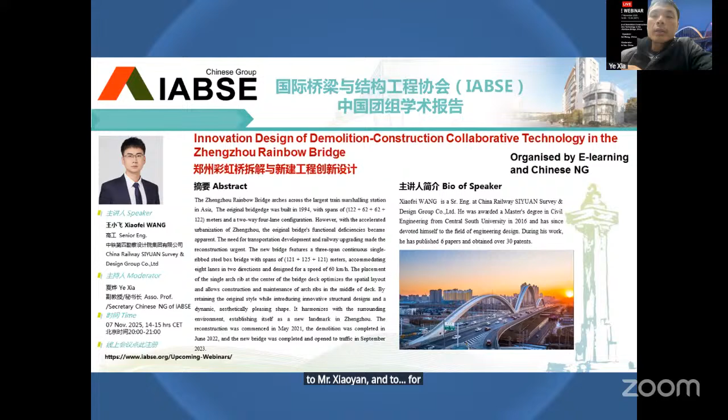All right, okay. Hello, hi Mr. Wang, so it's all yours. Okay.

Good evening, respected professors, distinguished colleagues, and dear friends. First of all, I would like to extend my sincere gratitude to IABSE for organizing this conference and providing us with such a valuable platform to share and discuss our academic achievements. It's a great pleasure to meet so many industry leaders and experts deeply committed to bridge engineering. I'm truly both honored and excited to be here today.

My name is Wang Xiaofei, from China Railway Siyuan Survey and Design Group Company Limited. Today I'm privileged to present my team's research titled Innovation Design of Demolition Construction Collaborative Technology in the Zhengzhou Rainbow Bridge. It focuses on the practice of bridge reconstruction over a large railway marshalling station. We address the critical challenges of safety and efficiency through innovative demolition-construction integration. Let's dive into the details.

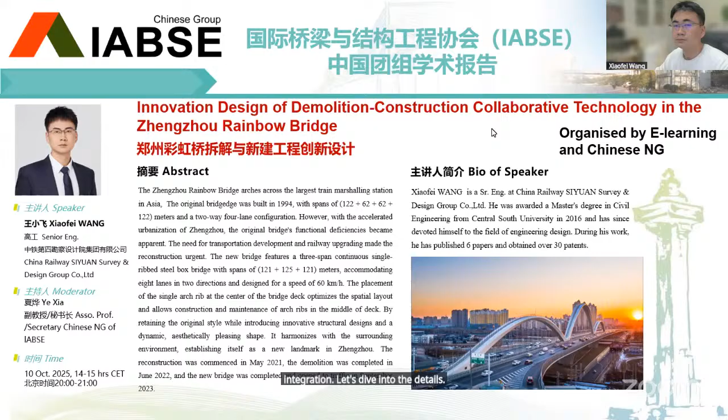Part one: the research background and project overview. The city of Zhengzhou is a major transportation hub in central China. It's not only rich in history, but also a city of dynamic development. It is crucially located at the intersection of the Beijing to Guangzhou and Lanzhou to Lianyungang railways, a nexus dominated by Asia's largest marshalling station, the Zhengzhou North Marshalling Station.

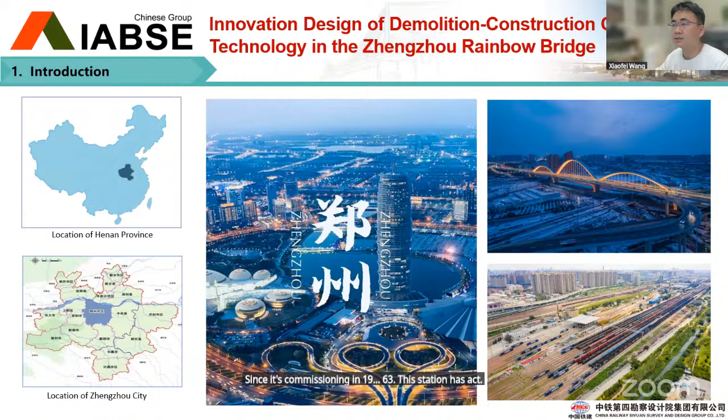Since its commissioning in 1963, this station has acted as the heart of the China railway network. Against the backdrop of China's rapid urbanization, old municipal bridges like the one in our case faced two key pressures: outdated functions and poor compatibility with infrastructure upgrades. This challenge is particularly acute for bridges over busy railway marshalling yards, where any demolition and reconstruction must avoid disrupting railway operations while also meeting growing traffic demands.

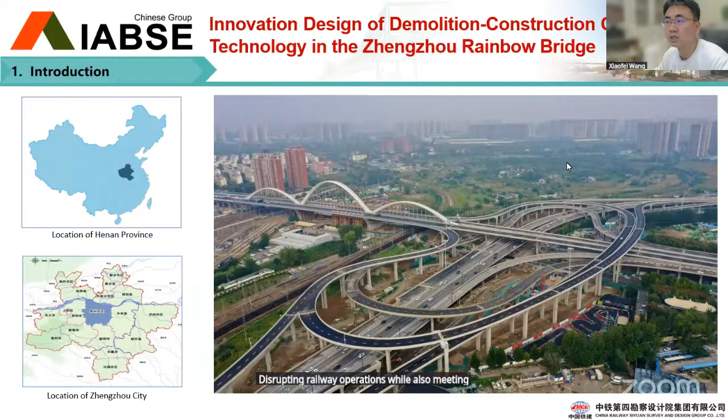The Rainbow Bridge in Zhengzhou is a typical example. It spans across the largest Zhengzhou North Marshalling Station, crossing 17 tracks from west to east, with numerous control points and extremely limited construction space. The task presented unique engineering challenges.

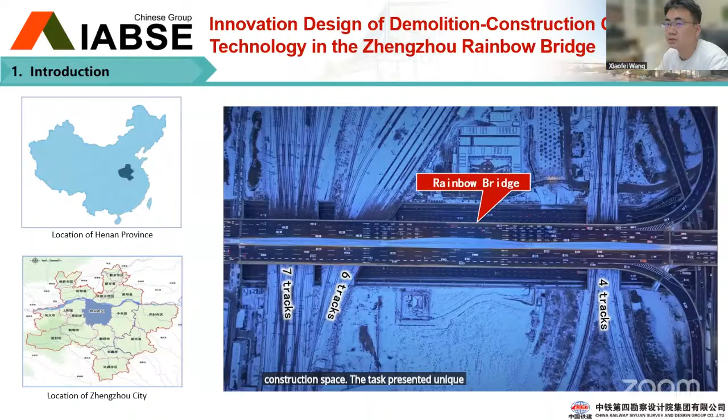The original arch bridge was built in 1994 with spans of 122 plus 62 plus 62 plus 122 meters, and 4 lanes in two directions. However, with the accelerated urbanization of Zhengzhou, the original bridge's functional deficiencies became apparent. First, traffic capacity shortage: 4 lanes failed to cope with the heavy flow on Zhengzhou's North Third Ring Road. Second, inconvenient connections to surrounding roads, including the Beijing to Guangzhou Expressway, significantly hampered traffic efficiency. Third, the clearance under the bridge became insufficient for the expansion of the Zhengzhou North Marshalling Station.

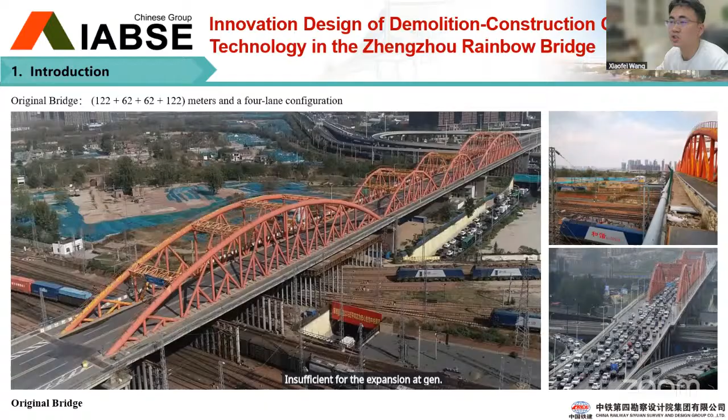To solve these problems, we designed a new bridge with 3 key upgrades. First, structure: a 3-span continuous single-rib steel box arch with spans of 121 plus 125 plus 121 meters. Second, function: 8 lanes in 2 directions and a 60 kilometers per hour design speed, significantly improving traffic capacity and meeting future renovation requirements for the railway station yard beneath it. Third, landscape: retained the original rainbow style with a dynamic shape, becoming a new urban landmark.

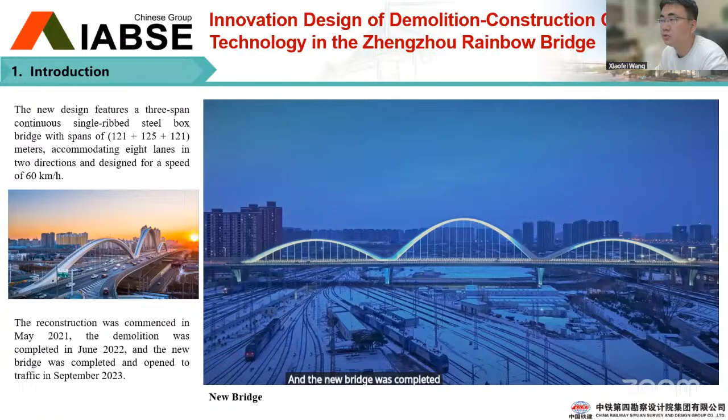The project started in May 2021. The original bridge was demolished in June 2022, and the new bridge was completed and opened to traffic in September 2023. Part 2: safe demolition of the original arch bridge.

The original bridge crossed 17 tracks from west to east. The first span crossed 13 tracks. The two 62-meter middle spans had no tracks beneath them, and the fourth span crossed 4 tracks.

The existing underpass roads on the north and south sides of the original bridge had very heavy traffic. Ensuring the safety of operating trains as well as vehicles and pedestrians using the roads on both sides was considered a priority during the demolition.

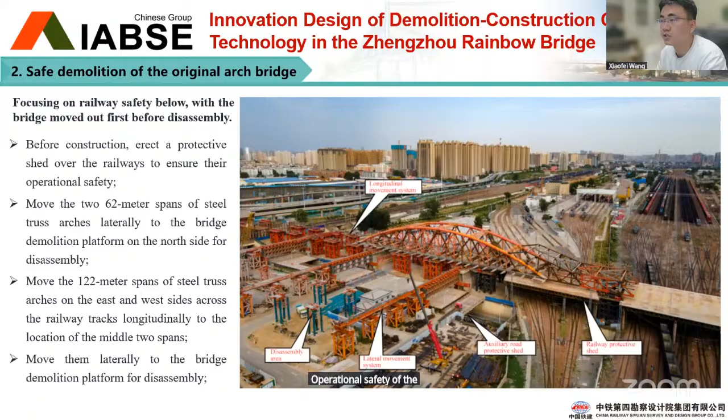Given the bridge's complex location and limited working space, an innovative overall construction plan was devised with a focus on ensuring the operational safety of the railways beneath the bridge. The plan involves several steps to move the bridge out of the railway safety range before disassembly.

Move the two 62-meter spans of steel truss arch laterally to the bridge demolition platform on the north side for disassembly.

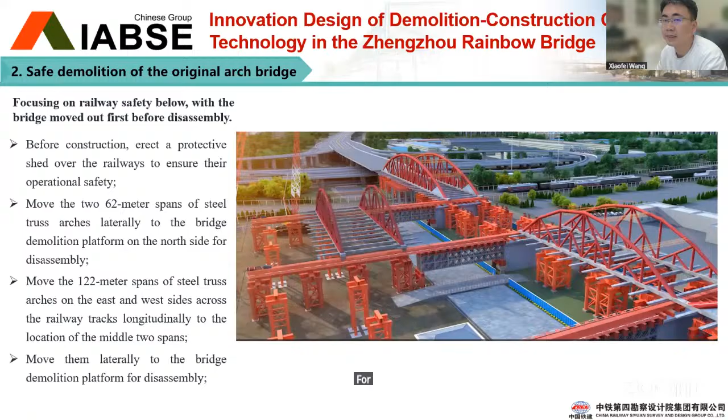Move the 122-meter spans of steel truss arches on the east and west side across the railway track longitudinally to the location of the middle two spans, and move them laterally to the bridge demolition platform for disassembly.

Before construction, erect a protective shed over the railways to ensure their operational safety, and erect protective sheds over the underpass roads to safeguard vehicle traffic and pedestrian safety.

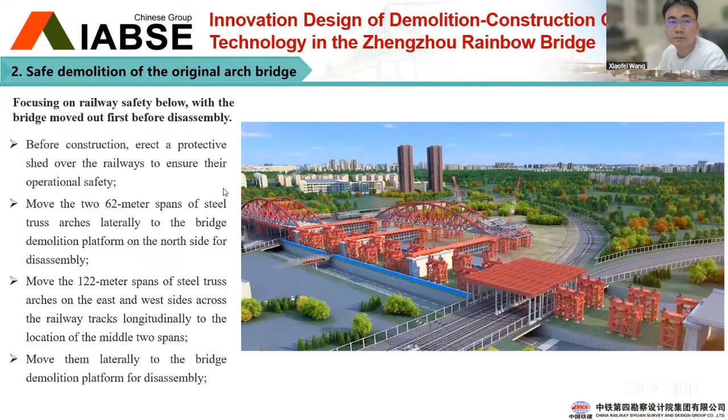Based on the stress characteristics of steel truss arches, featuring a walking-type incremental launching device with jacking slide blocks, a multi-support design reduces the stress on the truss members to a rational level during the incremental launching, maintaining the stability and reliability of the original bridge.

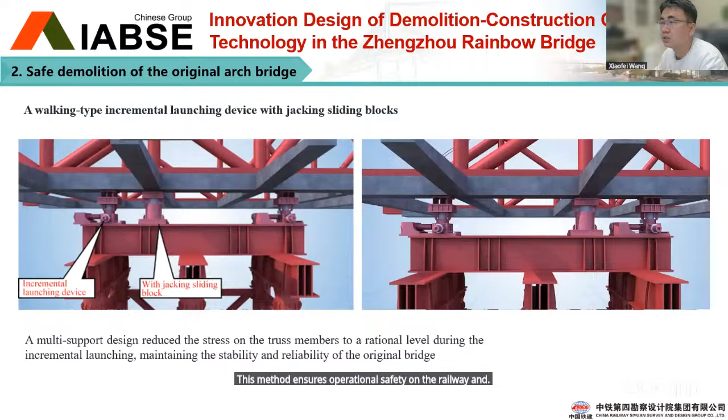This method ensures the operational safety of the railway and shortened the overall construction period.

Part 3: The single-ribbed continuous girder arch composite structure of the new bridge. As a landmark of Zhengzhou, the Rainbow Bridge embodies the deep emotions of citizens and has witnessed changes in urban development.

To accommodate the planning and upgrading of the railway station yard beneath the bridge, our project team considered various factors including location, traffic flow, and spatial layout. We proposed a 3-span continuous single-ribbed steel box arch bridge, designed with spans of 121 plus 125 plus 121 meters, retaining the multiple arches of the original bridge, resulting in a single-ribbed 3-arch configuration of small arch plus large arch plus small arch.

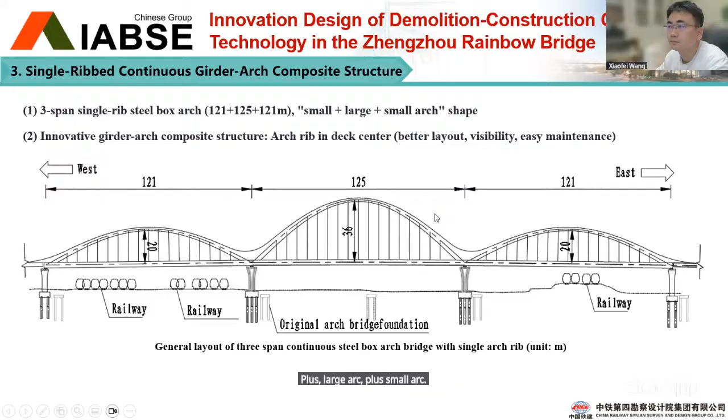An innovative single-ribbed continuous girder arch composite structure system is adopted for the bridge. The placement of the single arch rib at the center of the bridge deck optimized the spatial layout, enhances visibility for drivers, and allows construction and maintenance of arch ribs in the middle of the deck. This design also effectively reduces the impact of the bridge on the railway.

The main arch features an unequal height arch rib and inverted trapezoid steel box sections, with variable widths and heights. The middle arch is 36 meters high, with a rise-span ratio of 1/3.47, while the side arches are 20 meters high, with a rise-span ratio of 1/6.05.

The arch rib transitions gradually from a narrow and high cross-section at the bottom to a wide and flat cross-section at the top. This unequal height design takes into account the structural load-bearing capacity and landscape effect.

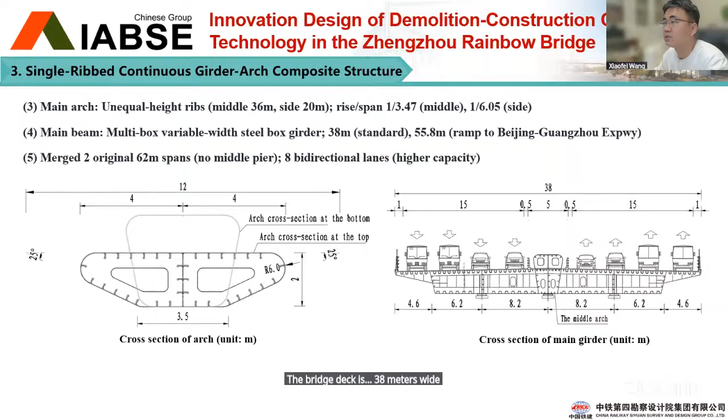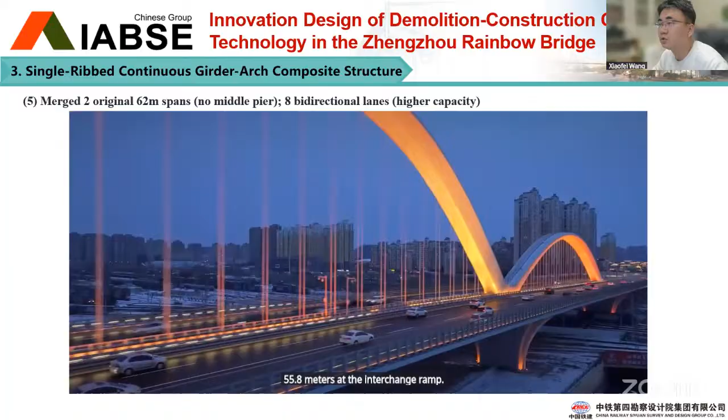The girder is a multi-box variable-width steel box girder structure. The bridge deck is 38 meters wide in the standard section and 55.8 meters at the interchange ramp, connected to the Beijing to Guangzhou Expressway.

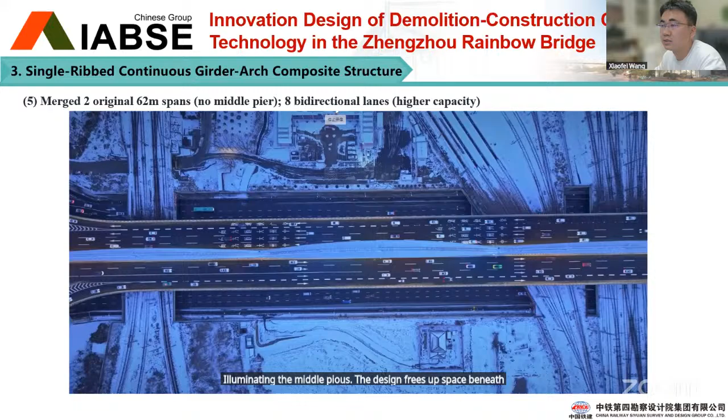To enhance traffic functionality and optimize spatial use, the two 62-meter small spans in the middle of the original bridge are combined into a single span, eliminating the middle piers. The design frees up space beneath the bridge and provides sufficient margin for future expansion.

Also, we designed an advanced health monitoring system and intelligent patrol robots utilizing artificial intelligence technology to replace manual inspections.

The robot comprises a track system, support climbing drive, and a mechanical arm system. It can automatically and intelligently inspect the interior of the steel box arch, enabling smart detection and facilitating visual management and maintenance within the constrained space of the arch rib. This innovation reduces long-term operation and maintenance costs.

To make the robot work well in such complex and constrained space, we have 4 key innovations. The first one is a lightweight prefabricated 3D track. It lets the robot carry loads, climb slopes, and turn, so it can adapt to different complex roads.

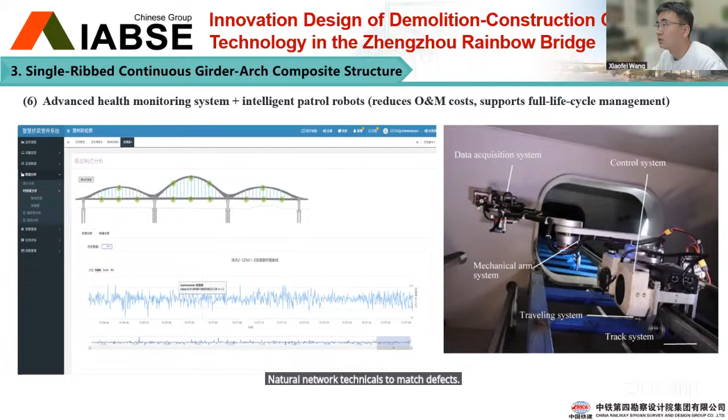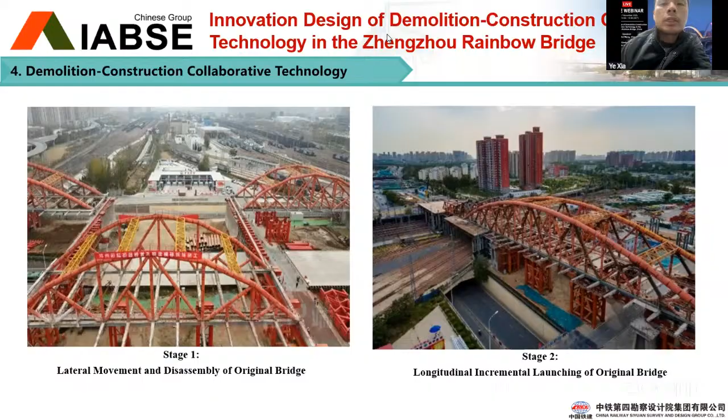Can you hear me? Do you have an internet problem? Xiaofei, can you hear me? Hi Brenda, can you hear Xiaofei? Or is it just my problem? Okay, I'll call him. Better now? Hi Xiaofei. I think Xiaofei got an internet problem. I'll call him to rejoin the Zoom. Hi, sorry everyone, I just talked to Xiaofei. He got an internet problem and will rejoin the meeting and continue from where it was broken. Let's hold for up to one minute. Okay, I think Xiaofei's back. Hello Xiaofei, can you hear me? Hello, hello Xiaofei, can you hear me? I think the Wi-Fi internet is restricted in some places, but the technology is not. So let's wait patiently for Xiaofei.

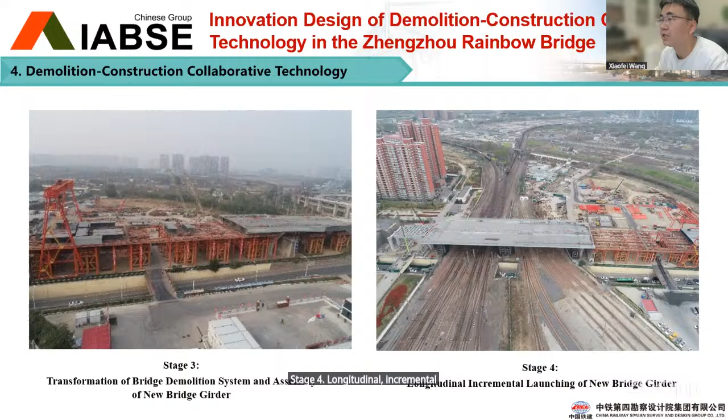Stage 3, transform the demolition platform into a new bridge assembly platform by adjusting elevation and position. Stage 4, longitudinal incremental launching of the new bridge girders. Stage 5, in-situ erection of new bridge arch ribs. Stage 6, complete suspender installation and system conversion.

In this project, the original bridge movement system was innovatively transformed to realize the integration of demolition and construction. During the demolition process, the pier foundations of the new main bridge were constructed simultaneously, and the steel box girders were prefabricated in advance. By raising the transformed demolition system, rapid positioning and incremental launching were achieved, which optimized construction and installation procedures and reduced complex processes during construction.

It only took 16 months from the completion of the old bridge demolition to the opening of the new bridge to traffic, which was 40% shorter than the conventional construction period. Meanwhile, the consumption of steel structure for temporary measures was reduced by about 500 tons.

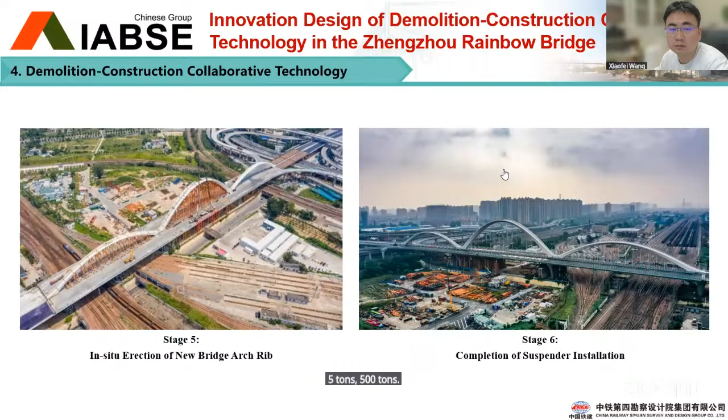Part 5, conclusion. This project established a new bridge type specifically for crossing large railway marshalling stations, with multiple advantages such as rational stress distribution, a straightforward bridge deck layout, enhanced driving visibility, a streamlined bridge shape, and convenient connection conditions at the approach bridges.

The bridge type demonstrates superior terrain adaptability and landscape harmony compared to conventional long-span layouts, offering a new technical model for the construction of municipal landscape bridges and bridges with special crossing conditions.

Second, the Zhengzhou Rainbow Bridge represents the first instance in China of bridge construction crossing a marshalling station through in-situ assembly of large girder segments and longitudinal movement using the transformed bridge demolition system. This innovative solution facilitates the rapid construction of long-span arch bridges over existing railways, significantly reducing construction and operational risks for similar projects.

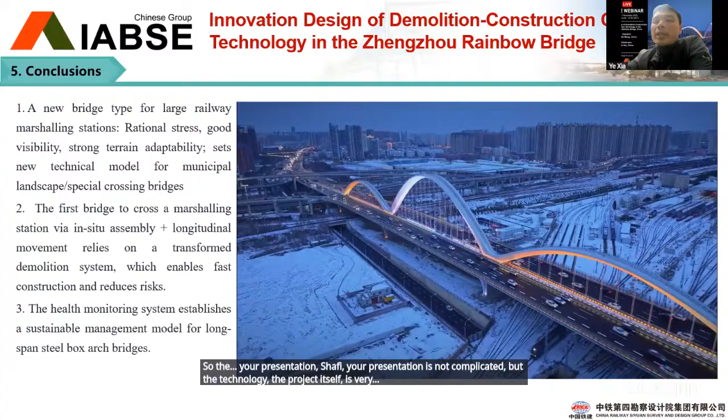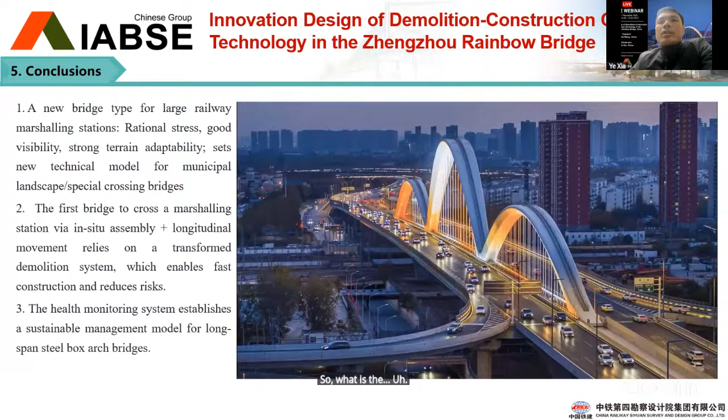Allow me to raise a question first. Your presentation is not complicated, but the technology and project itself are very complicated and interesting. The Zhengzhou Rainbow Bridge project was transformed from a demolition system into a construction platform. This is quite interesting—what are the key technical considerations when you consider both the old and new bridges together?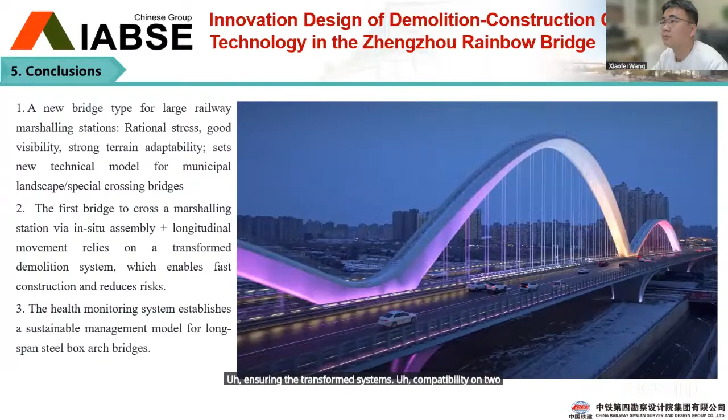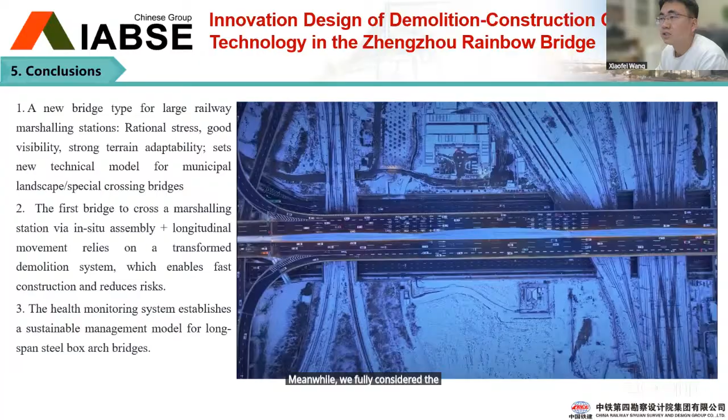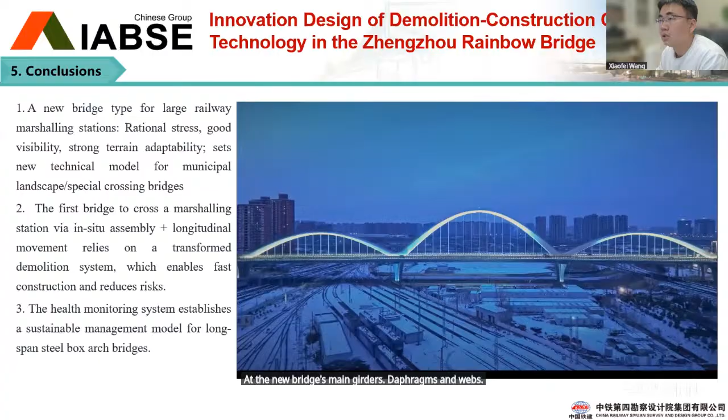Thank you for your question. Ensuring the transformed system's compatibility relies on two core technical methods. First, we designed the support system to accommodate both the old and new bridge. For the old bridge's truss structure, we added supports at key joints based on its stress characteristics, ensuring stability as the old bridge moves laterally and longitudinally out of the railway safety range. We also fully considered the support system's adaptability to the new bridge's steel box structure, arranging supports at the new bridge's main girders, diaphragms, and webs. Additionally, we developed a walking-type incremental launching device with jacking sliding blocks, which kept the stress of the old bridge truss and the new bridge stress at controlled levels.

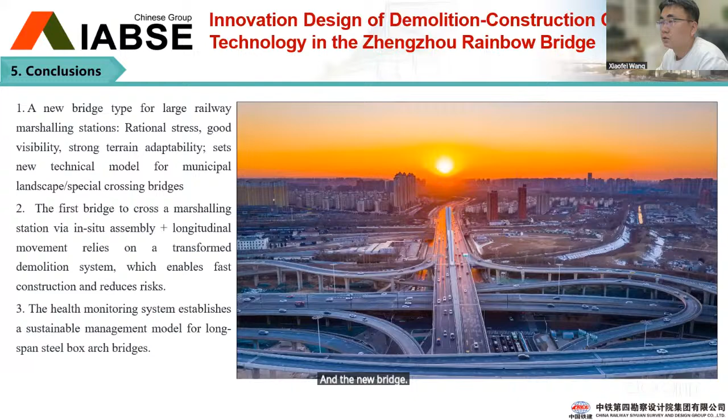We also reserved prefabricated structural interfaces on the device and demolition platform that meet the new bridge's assembly requirements, laying the foundation for converting the demolition system into a construction platform.

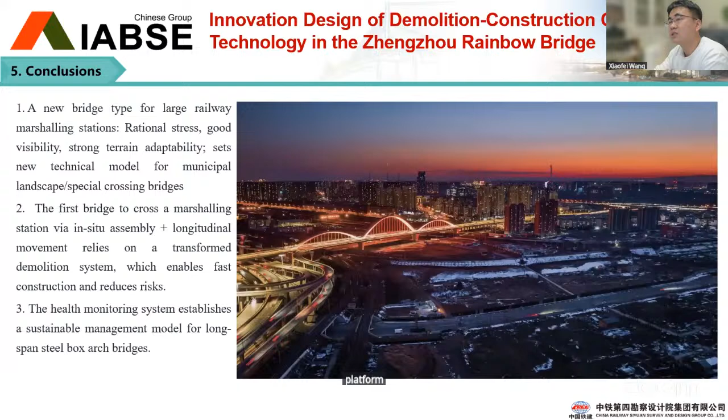Second, we integrated precise spatial control with elevation control. Before converting the demolition platform into a construction platform, we conducted rigorous surveys and calculations to adjust the platform's elevation and position, ensuring they fully matched the new bridge's assembly requirements. For elevation adjustments, we installed steel pier columns with flange connections between the original platform supports and the new working elevation. The flange connection enabled fast, precise, and reliable elevating and lifting. We chose this method for its high reliability and efficiency, which avoided the time-consuming processes of traditional welding or on-site reconstruction.

Hello again, cannot hear you. Hello.